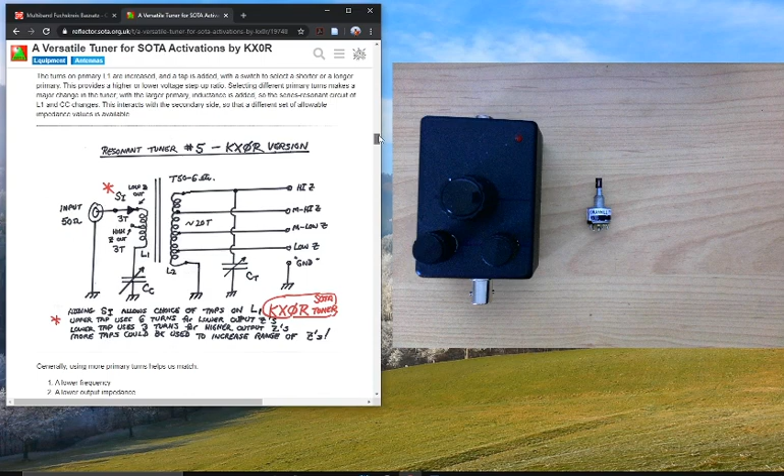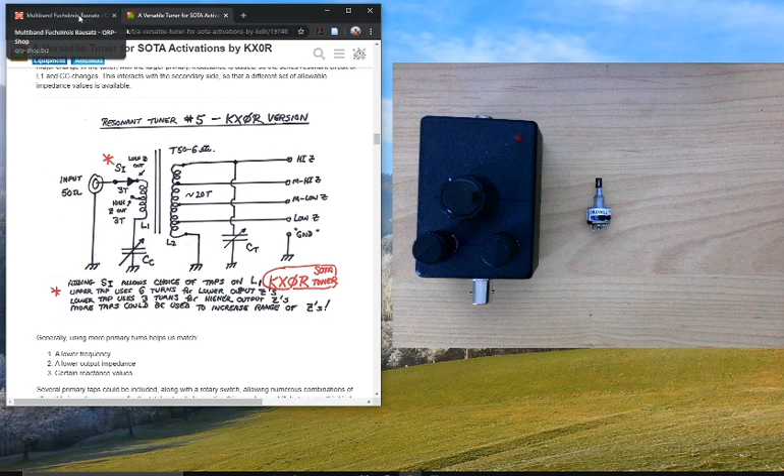And I have a finished one here that's been sent to me for repair, so we're going to have a closer look at this in a minute. What else? There is a lot of information about resonant end-fed tuners on the SOTA reflector. Here's a thread by KX0R. Loads and loads of theoretical information and considerations. Lots of diagrams. You can make either a very simple tuner or you can work your way up and make a very, very complex one. It's up to you. Or you can just stick with the Fuchskreis. So this is something that you can modify as well.

There are some English instructions to go with this kit. Here they are. And we have a nice circuit diagram here. You'll notice that unlike the version on the SOTA reflector, this version is wound on two toroids. We have one toroid for inductance, one toroid for coupling. So this is something you're going to have to consider very carefully if you're going to start modifying it, because it is slightly different.

So one other thing to mention before we go any further is some hams have complained that it's not easy to get a very low SWR on 80 meters. There are two ways you can approach this problem. One way that we're going to look at in this video is to add two more windings here. So instead of one winding, you're going to have three windings on L1 at this point here.

Another much simpler solution, which I've found effective, is just to make the antenna a little bit longer by about 2 meters, and that just helps bring the SWR down. I can get about 1.4 to 1 by making the antenna longer. But in this video, we're in search of perfection, so we're going to see what happens when we add a few more windings here. So there we go, that's the instructions.

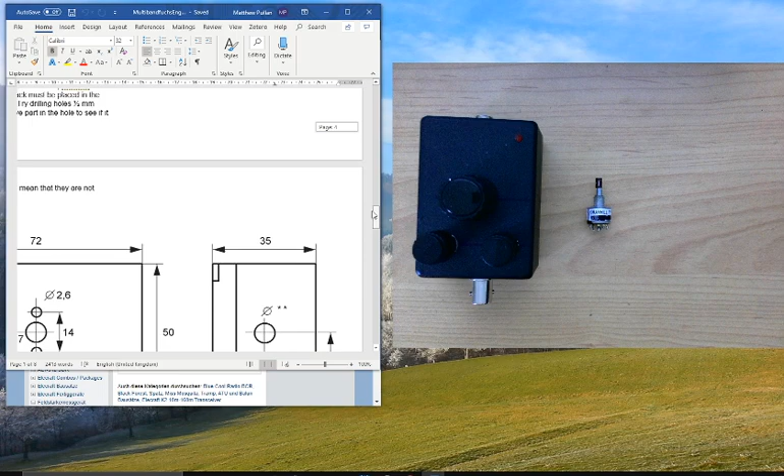The first thing to get on with, of course, is drilling your enclosure, and we have a diagram down here. Oh, one thing I should also point out is there's a parts list here. Okay, so if you're in America, you don't have to buy this kit and ship it all the way to America. You've got a parts list here. You can make it for yourself. These are all very easily got hold of on the other side of the Atlantic.

Drilling the enclosure, okay. It's always a good idea to use some masking tape on your enclosure. Cover it in masking tape. It makes marking it off and changing things around a lot easier. Another thing to be aware of is drill bit sizes, and the sizes of your components may not always be as specified. So it's always a good idea to start off small and work your way up.

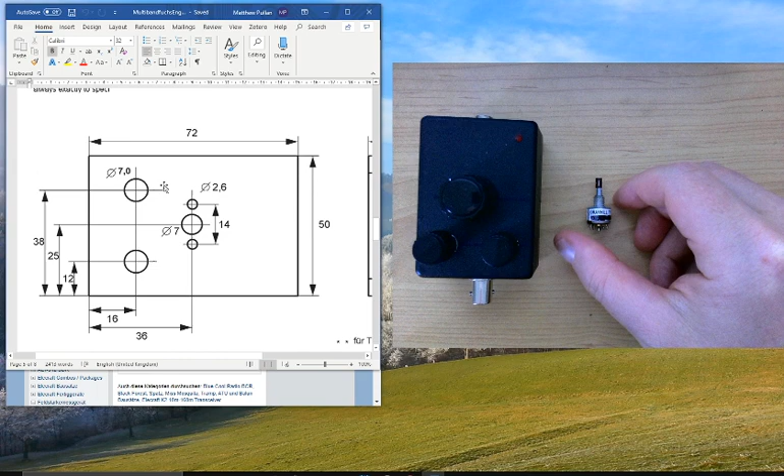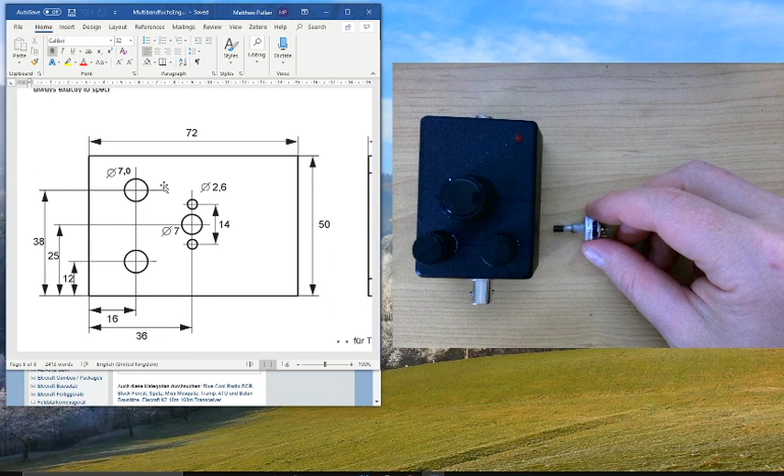One other thing is that some of these components, the rotary switches and the BNC, obviously have flat sides. It's intended that they should be gripped by the casing so that they don't move about. So again, you might want to start off just with the width of the actual flat sides on your rotary switches, and then use a file to enlarge the hole. That way your components are going to be gripped nice and securely.

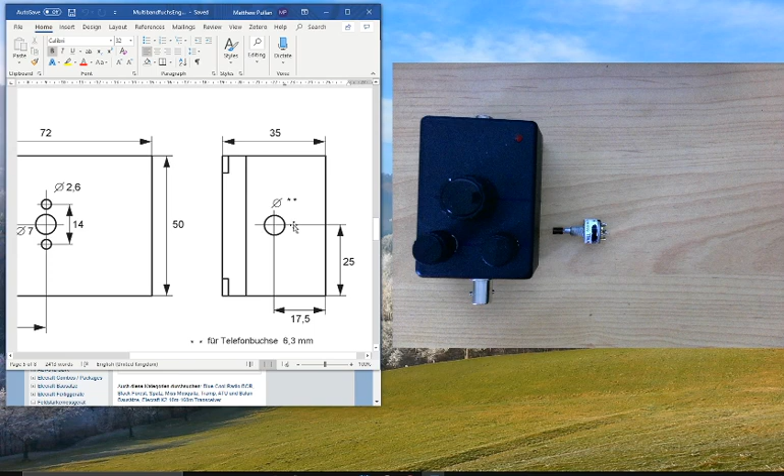And remember, when measuring everything, always measure with the lid on in this kit. You'll notice this is halfway. If you measure halfway here, your BNC is going to be off position. So I also have an old casing here from my old kits. Let's turn it round. And one thing you might also notice as you look at it is that things are in different positions.

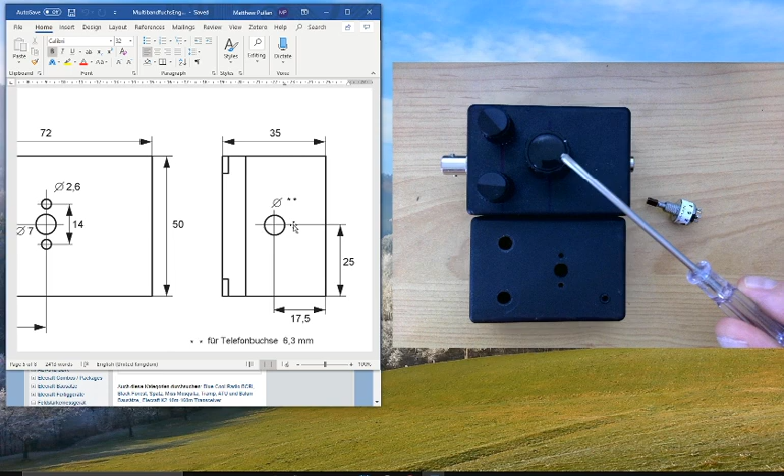If we look at this one that's been sent to me for repair, it's been made exactly as the instructions suggest it should, with the variable capacitor right in the middle. It works, but I find you can't get your finger in between those two switches. So it's a little bit crowded here, and there's no real reason for it.

It's very easy to move the variable capacitor in this direction towards the banana plug, and you can also move these rotary switches about 5 mils towards this end if you like, and it makes everything a bit more spaced out. Here you'll see the rotary switches are where they should be, but I've moved the variable capacitor back and it just spaces things out nicely.

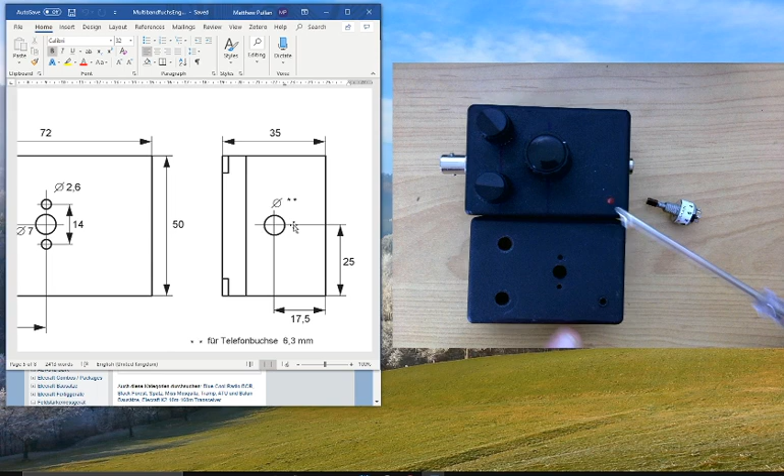One more thing to consider before we move on is this LED here. The kit comes with a holder. The person hasn't used the holder there, he's just put the LED straight in. You can do that, it's just a nice touch to use the holder. Also, it's a red LED. In broad daylight, a red LED will be a little bit hard to see, so I prefer to use a

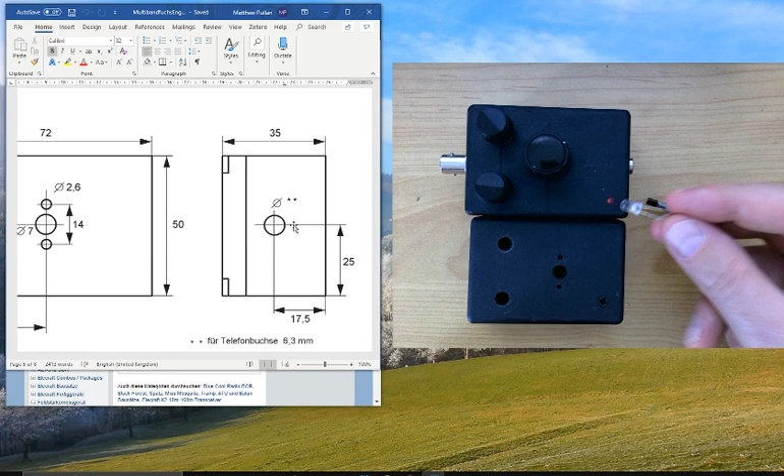white or blue LED. This idea was originally given to me by Thomas Zirk, OE6TZE, who's provided a huge amount of input and guidance to me on making these kits. I'm very grateful to him for that. So we're going to be sourcing a white or blue LED to go in here. We haven't got one yet, that's to come.

So like I say, this tuner has been sent to me for repair. It's not working for one reason or another, so we're going to have a look at this. We're going to completely rebuild it and see what we can do. I've taken the back off. Let's have a look inside it.

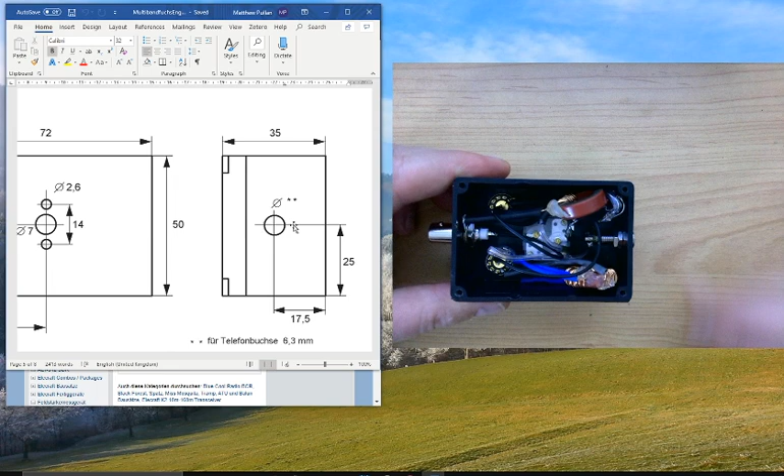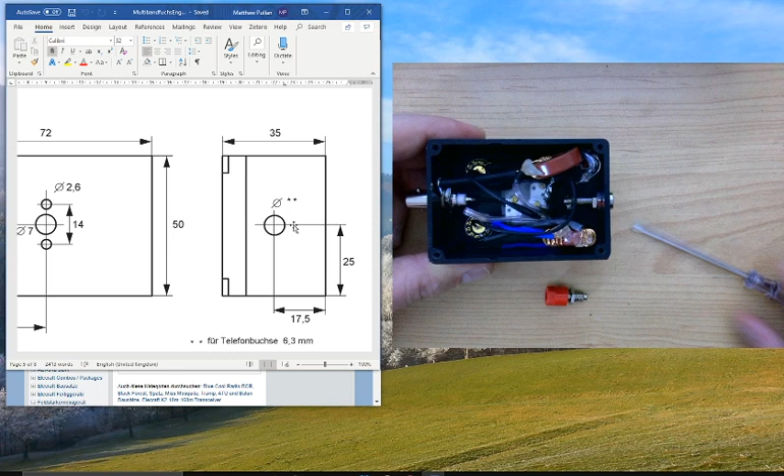The first thing to note when we look at this is actually the banana plug. It might look fine, but actually it's made out of stainless steel and it won't solder at all unless you have the right flux. Even then, it's just a lot easier to just buy a nickel one. So the first thing to do is we're going to swap out this banana jack, this banana socket, for a nickel plated one, which are all very, very inexpensive. No reason not to get one of those.

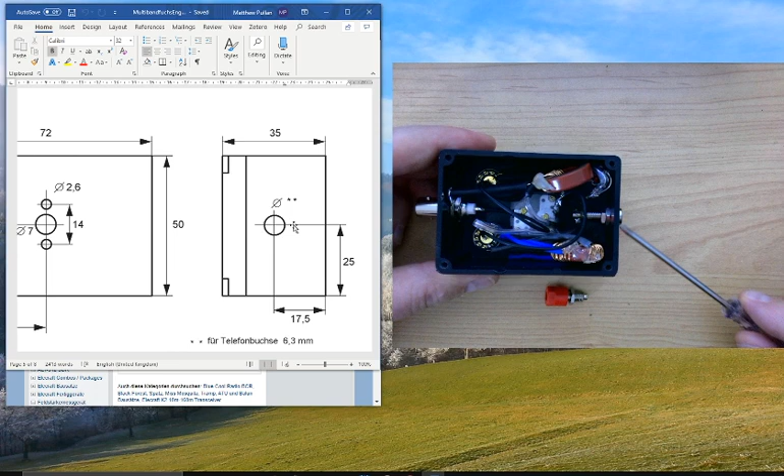I don't know what happened somewhere at the QRP shop. A load of these stainless steel banana sockets have unfortunately got into the kits, and there's lots of frustrated hams all over Europe desperately trying to solder them and having no success whatsoever.

If we have another look at this kit, we'll see it's really very crowded. It's not easy to see where things are going. We've got wires going all over the place, lots of hot glue, which I try to avoid wherever possible. I mean, the wires are insulated, that's fine. You don't have to insulate them, it will work fine without them.

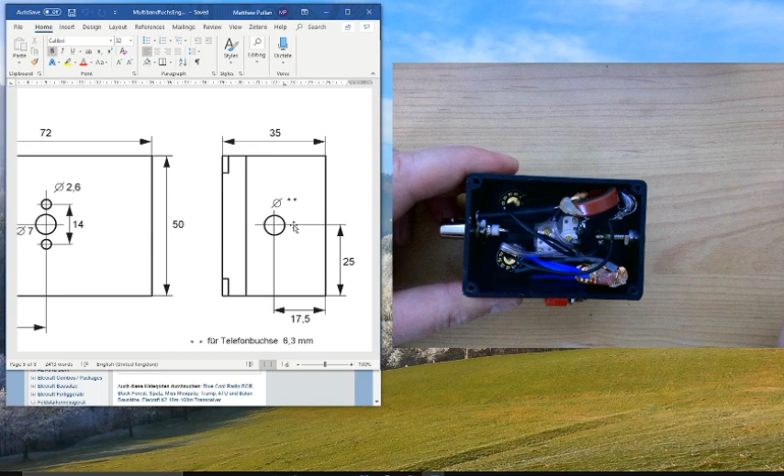If we have a look at some of these switches, oh dear, we can see here when I turn that, it's very loose in that hole, so that's one issue we're going to have to look at. And this one, yeah, it's moving a bit on that side. So these rotary switches are a little bit loose. We're going to have to take the whole thing apart.

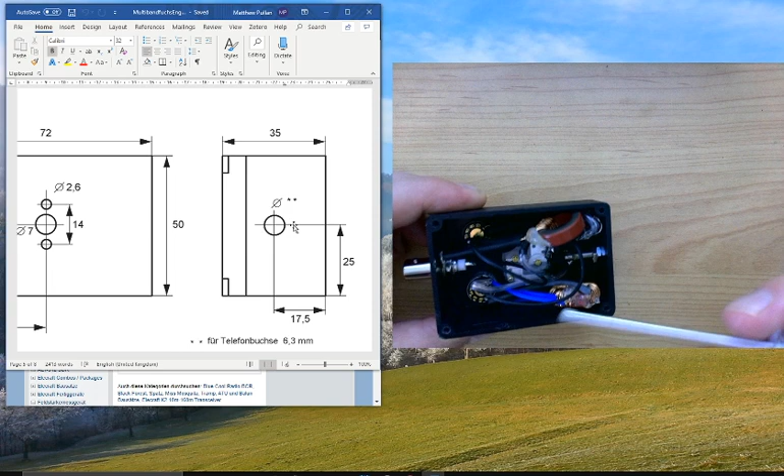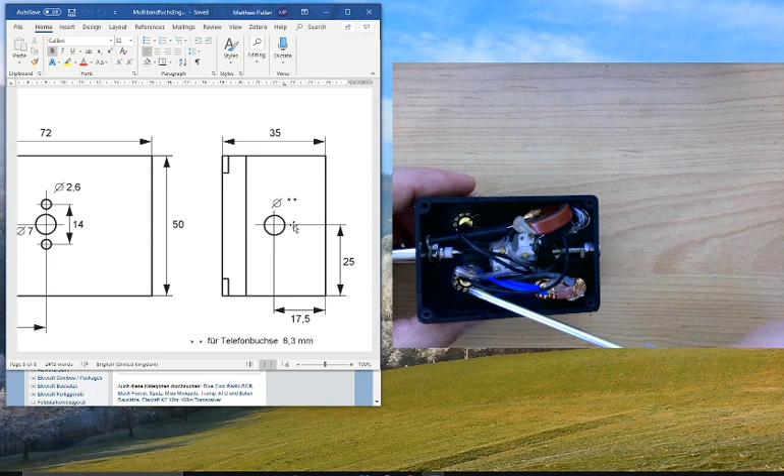It looks to me like the main problem is whoever made this assembled it or tried to assemble it with the rotary switches in place in the housing. This is really a recipe for disaster. If you are going to make this, you must get a set of helping hands, and you can make these leads much shorter and assemble the whole thing, assemble the rotary switches and the toroids outside of the enclosure. Your whole assembly is going to be a hell of a lot easier if you do that.

So yes, we're going to have to strip this down completely and start again. But that is for another video. This is going to be in 3 parts, this series. So in the next video we're going to look at winding these toroids properly and some of the issues regarding winding those. Many people find that a bit tricky. It's not too bad if you just follow the instructions. And then the final video, we're going to look at the final assembly of the unit and probably see if there isn't a better sequence we can use.

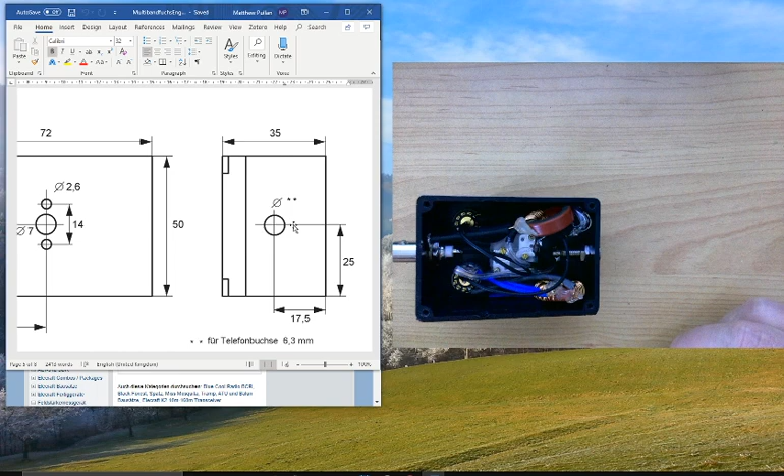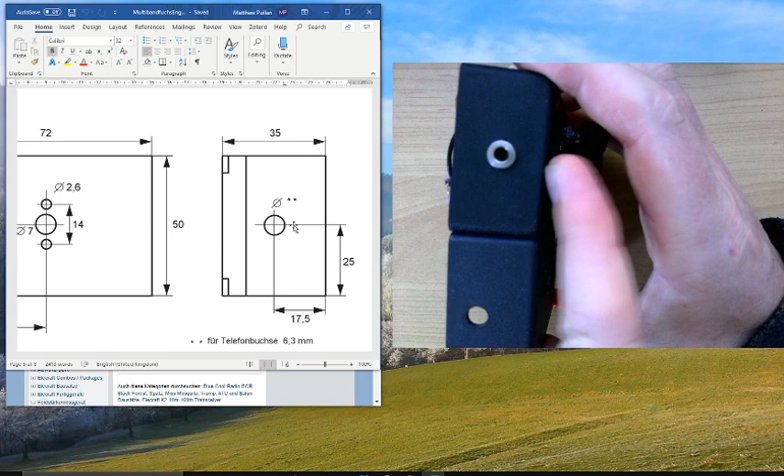Just one last thing before we move on. You'll notice that, as I pointed out earlier, you should always measure with the lid on, and here's what happens if you don't. You'll see that the banana jack there is not in the middle. It just means it's much deeper in the housing, so it's a lot harder to get to and fiddle with, and the same goes for the BNC on the other side. It's a lot deeper in the housing, so you're making a rod for your own back if you don't measure with the lid on.

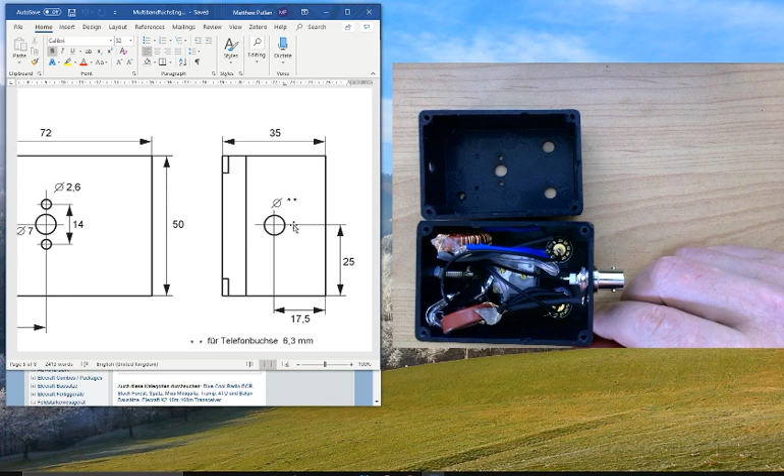So that's all for this video. I hope you found it useful, some useful information there. Stay tuned for part 2 and part 3, where we completely strip this down and rewind the toroids, see if we can't improve this Fuchskreis.